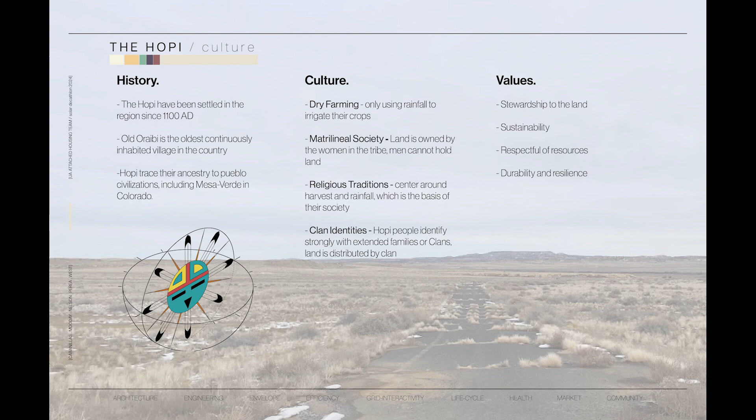Of the 14,000 registered tribe members, only about half reside on the reservation, a number that is declining. Many young Hopi leave for job and educational opportunities in larger cities and often do not return, leading to a significant gap in the young and working age populations. This trend comes at the cost of losing touch with Hopi culture. The aim is to encourage these populations to stay by creating Tawa'ovi to offer job opportunities, education, and modern conveniences on the reservation.

Many of the Hopi still live in villages with traditional homes. 35% of Hopi homes lack running water and electricity, leading to an acute lack of safe and comfortable housing on the reservation. The Hopi asked for an attached housing proposal to help solve this problem. The Hopi tribe used a detailed SWOT analysis to define the goals of the new village. They emphasized their rich historical and cultural values, but acknowledged challenges such as their coal dependency, lack of housing, and lack of infrastructure, issues that we aim to address through our project.

In their landmark Economic Strategy Council in 2000, the Hopi outlined the following vision for the future of the tribe. Hopi should be a place where Hopi culture and religion are strong, sacred sites are protected, culturally and environmentally sensitive development occurs, the land is looked after, there are jobs and businesses, quality infrastructure serves, everyone has their own quality house, public facilities serve all needs. Our mission is to help the Hopi obtain their vision by providing comprehensive housing solutions that reinvest in their community and keep true to Hopi values.

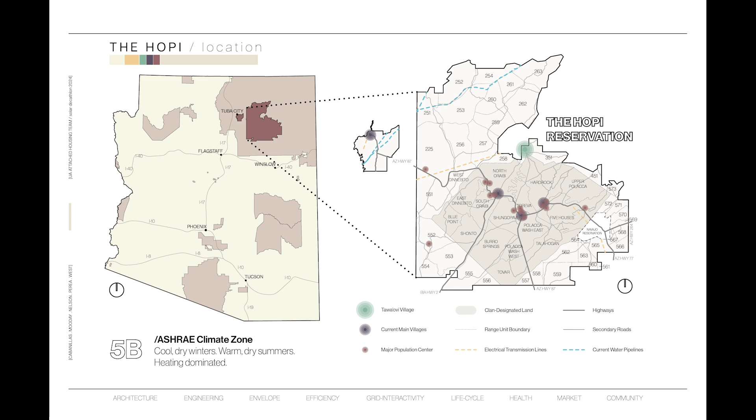Tawa'ovi, translating to Place of the Sun, or Sun Village, was chosen by the Hopi tribe to be on a remote site away from clan and spiritual lands. The project is in ASHRAE Climate Zone 5B, so it is cool, dry, and heating dominated, with an annual temperature range between 20 and 90 degrees.

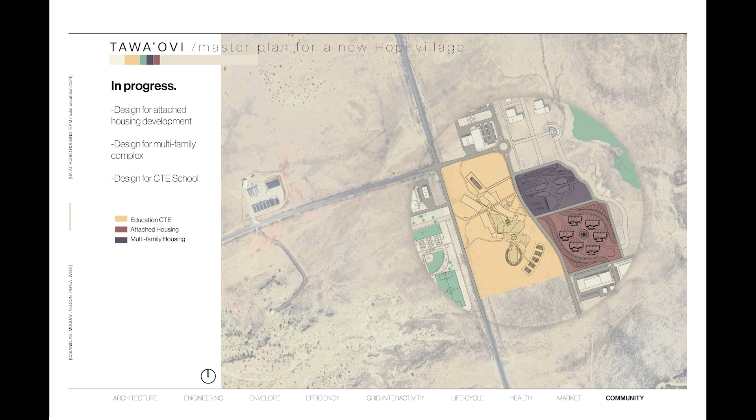This is the site of Tawa'ovi in its current state, as there has already been progress done on the solar farm. This is the progress being proposed by the Solar Decathlon studio, including our attached housing site, seen in red, which neighbors the multifamily complex and the education building. These 3 projects will act as a strong base for Tawa'ovi, providing necessities. In the future, this is what Tawa'ovi is imagined to expand to, creating a culturally rich and self-sufficient community that utilizes our scalable design to provide more housing as the community grows.

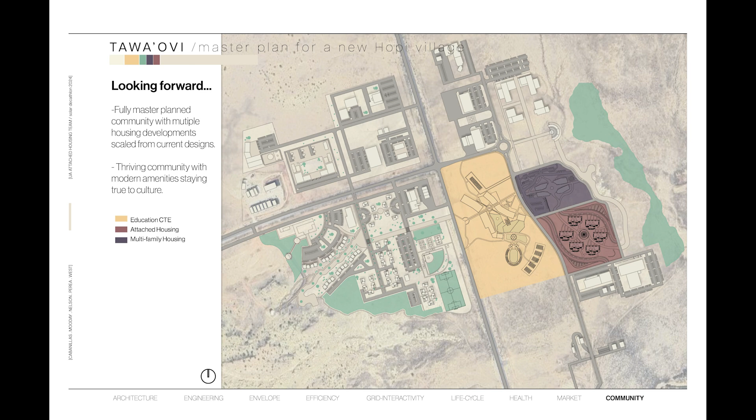The Hopi's coal-dependent economy was devastated in 2019 with the closure of the Peabody coal mine, in which the nation lost 85% of their non-federal revenue, ultimately leading to their commitment to transitioning to clean and renewable energy moving forward. To achieve our ambitious goals, the first step is to establish a resilient energy source for this remote community, which is too far away to be connected to the main electric grid. Working with the existing solar farm, we are designing each building to be a GEB, Grid Interactive Efficient Building, that draws energy from within a microgrid.

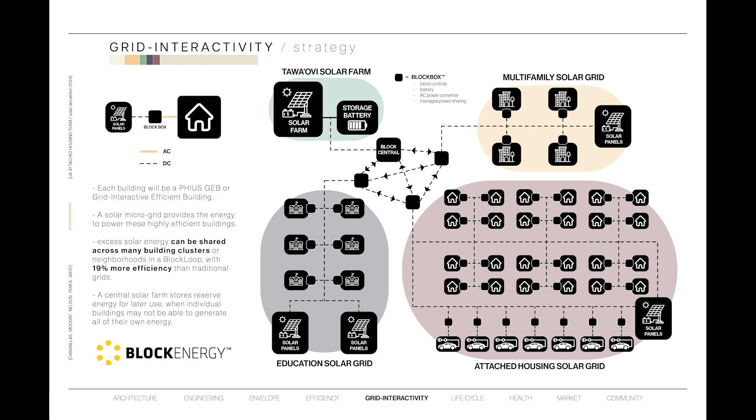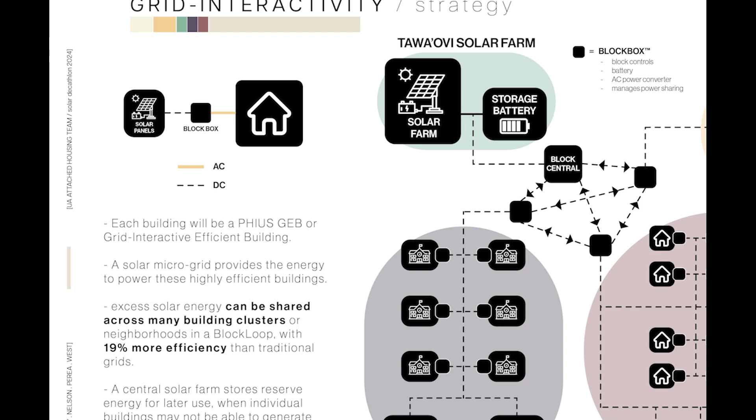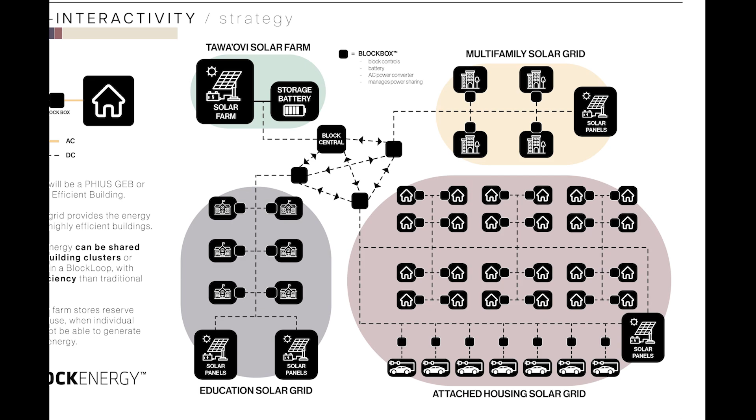Partnering with Block Energy, we utilize their innovative block boxes to distribute DC electricity from solar PV to each building. These interconnected smart batteries allow seamless energy sharing, resulting in 19% higher efficiency than traditional grid systems. Moreover, neighborhood block loops can be connected to create a resilient grid of grids rooted back to the solar farm, smoothing out duck curves, and most importantly, providing energy sovereignty to the Hopi.

We developed 4 goals that respond to the specific requests of the Hopi. First, we want to celebrate culture by implementing traditional Hopi design motifs that will allow people to resonate with the building. Second, we want to cultivate community by providing shared cultural spaces that will allow neighbors to connect. Third, we want to prioritize efficiency by adhering to PHIUS Zero standards and emphasizing passive strategies. Lastly, we want to promote well-being through careful site design and the use of clean energy.

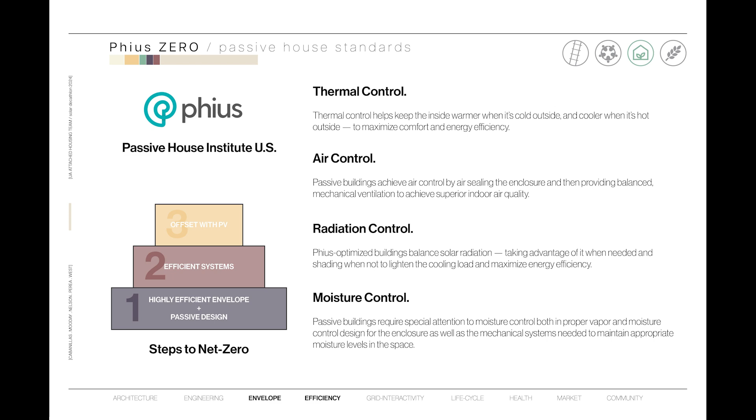Designing net zero homes can be challenging, but by aligning Harvest Mesa with PHIUS Zero standards, the path to net zero housing becomes clear. Phius prioritizes climate-specific thermal, air, moisture, and radiation control to create highly efficient interiors requiring minimal energy for heating or cooling. Using efficient systems offset by photovoltaics enables net zero energy consumption for the community.

Harvest Mesa features clusters oriented to maximize solar heat gain during the cold winter months. Per the Hopi's requests, the main paths are oriented on the summer solstice lines, anchoring this project in its environment. These paths lead to a central plaza, also serving as a jogging route, while berms and swales direct water flow to gardening plots at the corners of the site, enabling residents to cultivate their own crops.

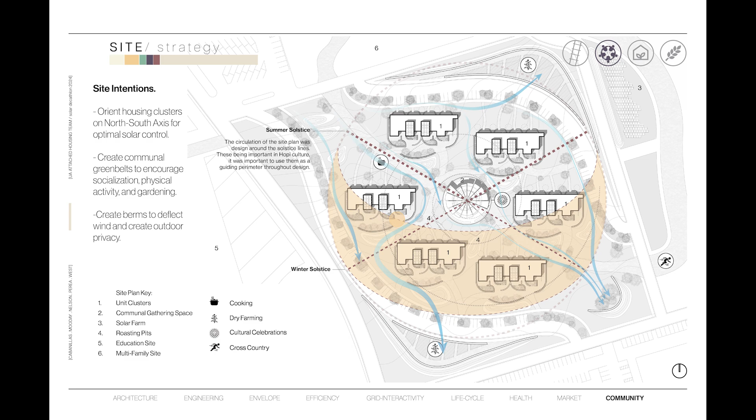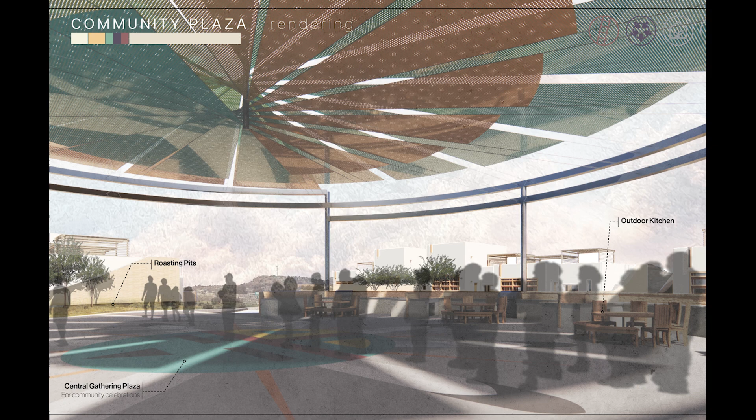As shown in this rendering, the community plaza provides a grand space for traditional celebrations and gatherings, along with providing community kitchens, as we learned the Hopi place great value on being together. We implemented health-enhancing strategies at 3 scales. On-site, berms and walls block windborne dust, and vegetated areas filter air pollutants. Inside each unit, an ERV supplies fresh air, improving air quality, and by utilizing clean energy, we prevent pollution, aligning with Hopi values.

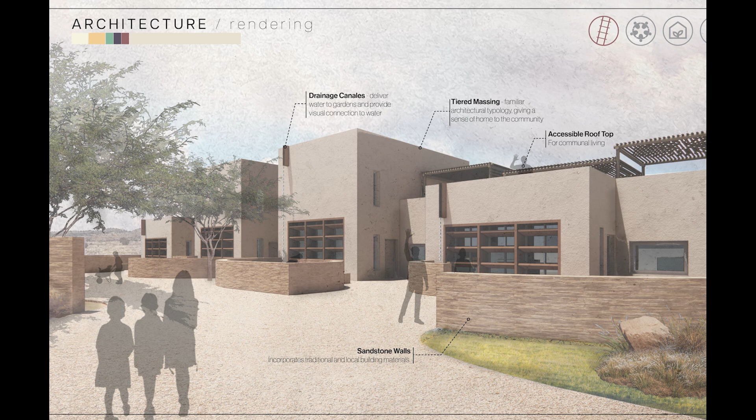To make this community feel like home, we've adapted traditional Hopi architectural motifs, including a tiered massing that enables close and communal living. Additionally, site walls create inviting spaces between units that gracefully encourage spontaneous interaction between the residents. After harvest, the Hopi need space to sun-dry their crops, so we designed shading structures on the accessible rooftops. These shaded rooftops provide another opportunity for gathering within the condos.

We offer 2 unit types to accommodate different family sizes. There is a 2-bed, 1-bath unit and a 3-bed, 2-bath unit, with 2 of each totaling 4 units per cluster. The Hopi asked for units to have an open floor plan as it allows for more space for celebrations and for families to cook together. We also included green spaces for each unit.

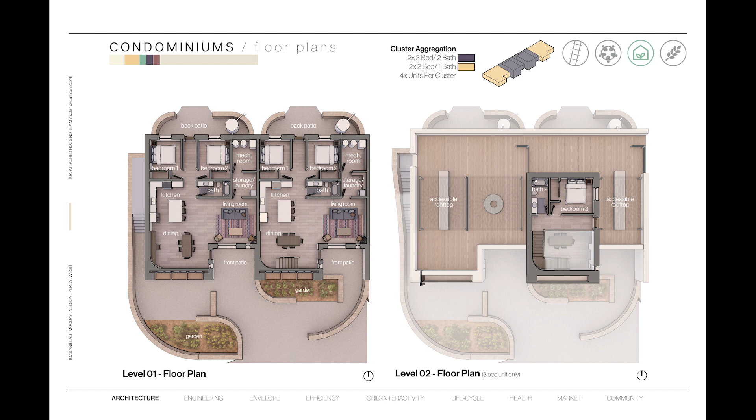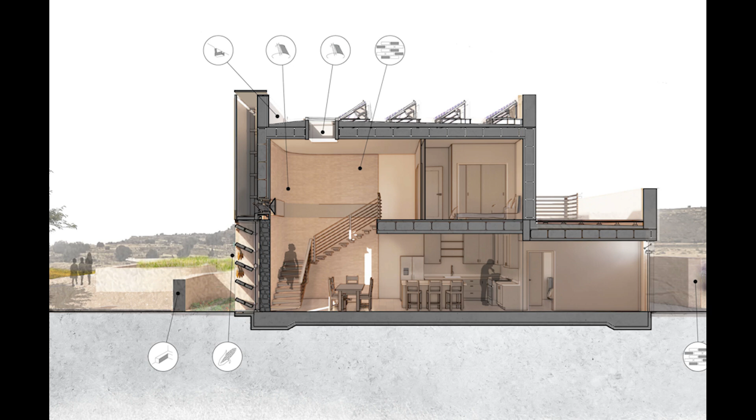You'll notice that in the section, each condominium features traditional design elements such as canales, outdoor gathering benches, and locally sourced sandstone throughout, with the goal of creating familiar and comfortable surroundings for the residents. In the interior, a rounded wall, light wooden staircase, and skylight reflect the form of the kiva, a space connected with Hopi spirituality. The Hopi were also excited that the use of sandstone will revive the Hopi masonry trade in the community, creating new jobs.

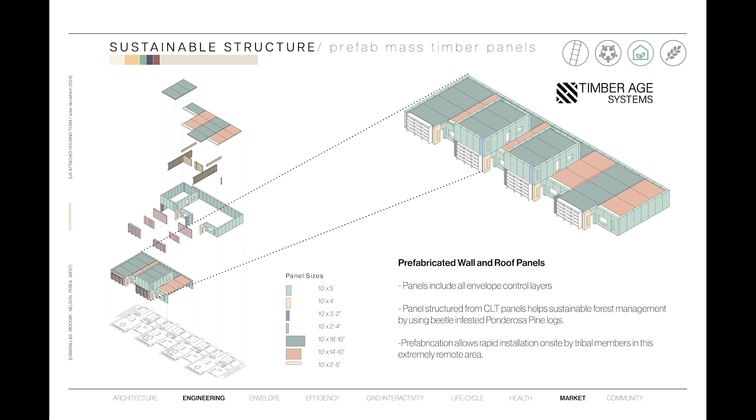Due to the site's remote location, we opted for prefabricated parts for easy transportation and rapid assembly. We've teamed up with Timber Age Systems in Durango, Colorado, which manufactures Phius-certified CLT wall and roof panels that support healthy forests. Clusters are designed in modules with dimensions that fit the bed of a semi-truck. Glulam beams support the second story with longer roof spans. Timber Age has volunteered to teach Hopi construction crew how to install panels on site, stimulating the local economy by creating construction jobs.

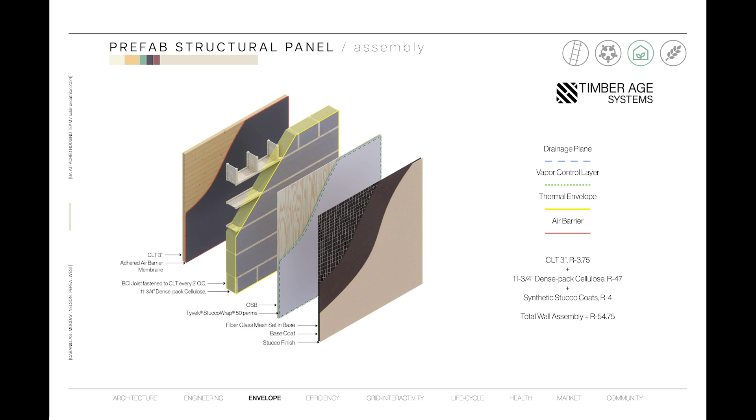Each panel features a 3-inch CLT panel for structure. Air and vapor control are included within the assembly, and thermal control is provided by dense packed cellulose sandwiched between 11-inch thick I-joists. Synthetic stucco is used as the exterior cladding, as it resembles a traditional plasterwork but lasts longer in this harsher climate. Examining the wall section detail, we see again how the panels are designed to seamlessly connect with the roof and foundation, ensuring continuous insulation throughout and minimizing thermal bridging at connection points, as tested by our THERM model. A pedestal paver system is also included to make the rooftops accessible.

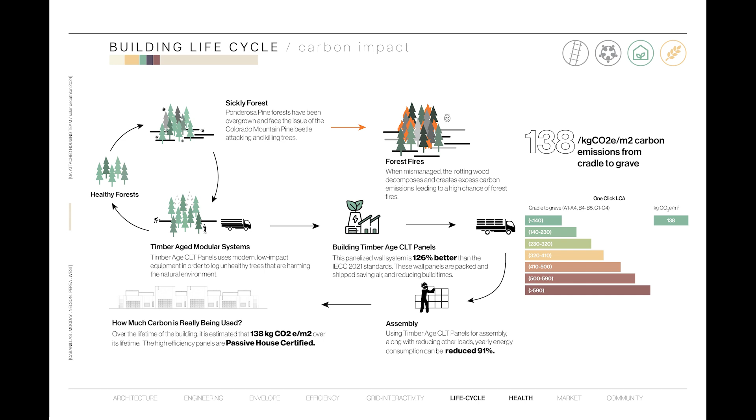The prefabricated panels, sourced from Timber Age in Durango, Colorado, address the challenges posed by the Colorado mountain pine beetle infestation. By repurposing dead, fallen trees for CLT production, Timber Age not only mitigates forest health risks such as wildfires, but also employs low-impact equipment to minimize carbon emissions. Our analysis using One Click LCA indicates low carbon emissions from cradle to grave.

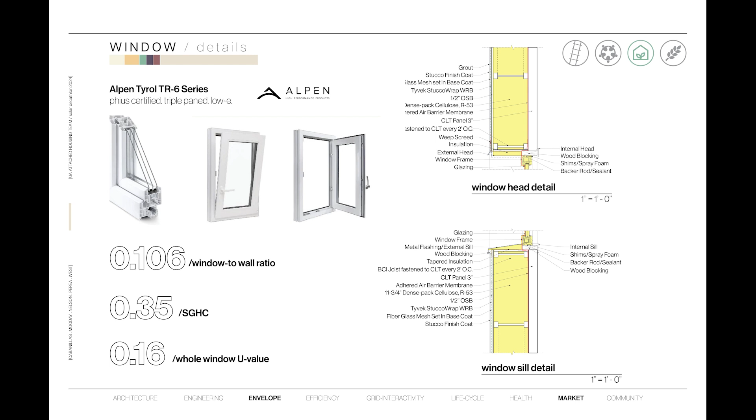Responding to the Hopi's preference for fewer, more efficient windows, we strategically place Phius-certified triple-paned windows for passive solar heat gain and optimal daylight, maintaining a low window-to-wall ratio. We prioritized using local products and services to reduce transportation costs and reduce our carbon footprint. We've used sustainable materials that come in $500,000 under our Kickstart budget of $2 million provided by the CARES Act of 2020. As Hopi crews skill up and do more of the work themselves, we expect costs to decrease by 3.3% over time compared to conventional construction methods.

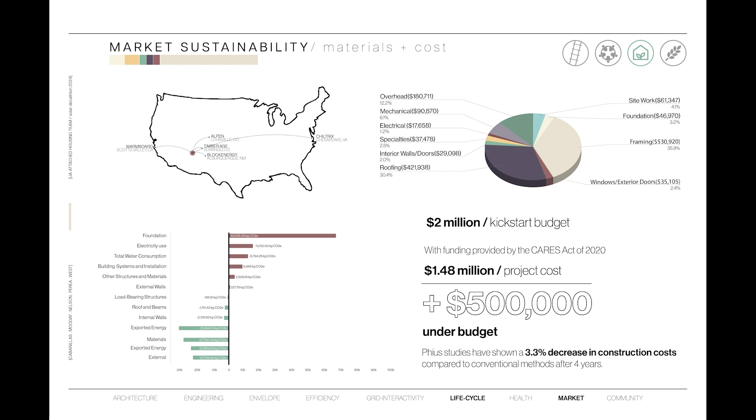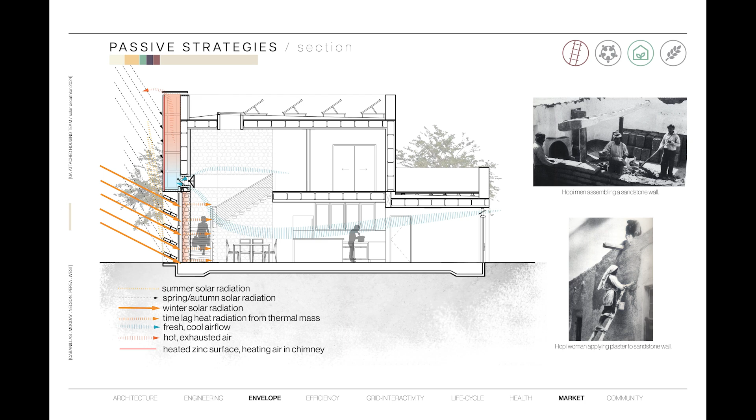This homegrown housing ensures access to clean energy, job security, education, and Hopi kinship within the reservation, strengthening the connection to their homeland. We are so excited about presenting our passive strategies because when meeting with our Hopi clients last month, they were really enthusiastic about how we have learned from their traditional wisdom and materials to provide comfortable, up-to-date, and efficient housing.

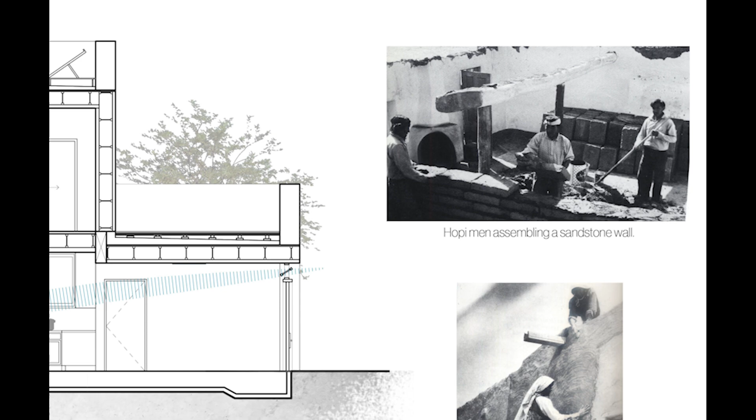Andrew, our tribe liaison, noted that for centuries, the Hopi have utilized local sandstone for natural heating and cooling in their homes, a wise use of thermal mass. We've designed an innovative passive wall using this sandstone and a Trombe wall combined with a solar chimney, leveraging the abundant sunshine for both heating and cooling in the project.

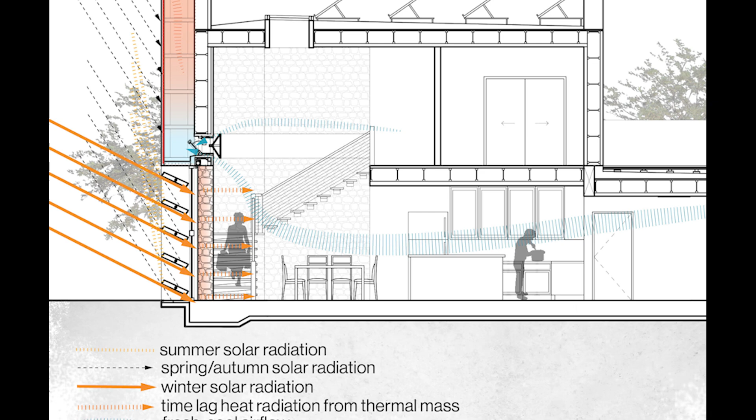In the Trombe wall, sandstone absorbs and re-radiates heat, providing 24-hour heating and reducing mechanical loads upwards of 49%. In the solar chimney, air is heated and rises, drawing cooler air through the building, exiting through an automated triple-pane window which opens based on interior and exterior conditions.

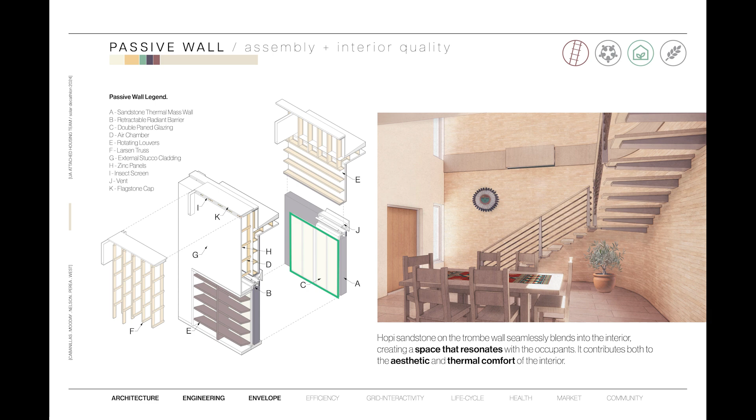The Trombe wall covers a large part of the southern facade to maximize solar gain. The assembly includes clear glazing, which allows solar energy to charge up the sandstone thermal mass wall. Above, a Larsen truss creates an air chamber, an essential part of the solar chimney. Inside, the Trombe wall has been fully integrated into the architecture, creating a kiva-like interior.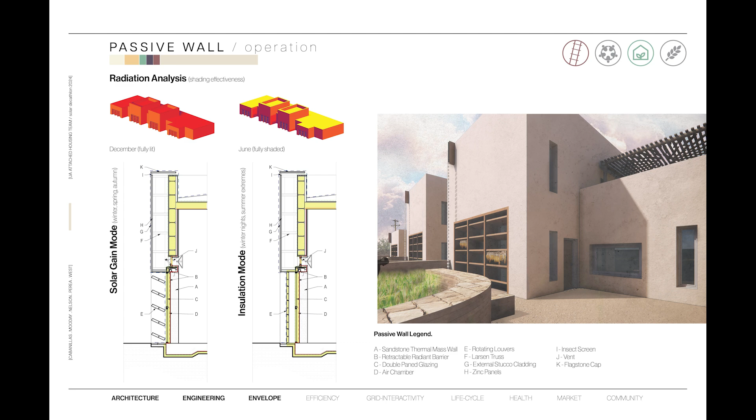Shading louvers play a crucial role in managing summer solar gain, as shown in the radiation analysis. Fully insulated, these louvers can be closed to create an additional thermal barrier of R15. Additionally, they provide space adjacent to the gardens for drying crops. In the details, you can see how the decorative fascia conceals the operable window in the solar chimney, as well as the retractable radiant barrier in the Trombe wall for added insulation.

A radiant floor system will be providing both heating and cooling. Hot and chilled water for the radiant system will be provided by a Chiltrix air-to-water heat pump and stored in a buffer tank which acts like a thermal battery. From the tanks, a pump will send the water to a manifold that will distribute the water to the zones requiring space conditioning.

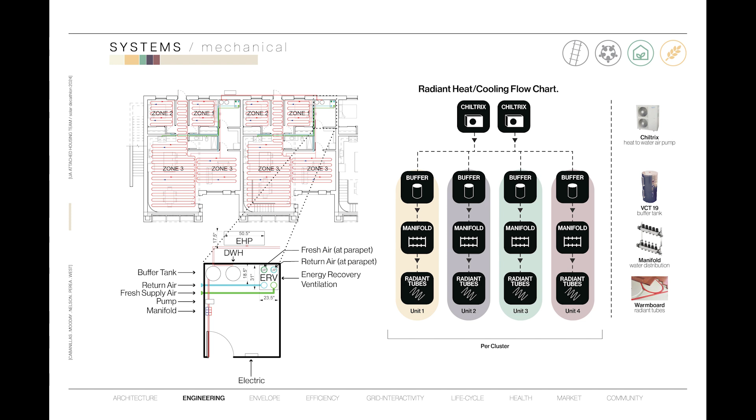A hydronic system is more efficient than a forced air system because 1 unit of water can carry much more heating or cooling energy than the equivalent amount of air. Moreover, it eliminates the need for refrigerant circulation, reducing the risk of leaks and the contribution to global warming. This diagram shows we've coordinated the passive and active systems throughout the seasons to maintain thermal comfort efficiently.

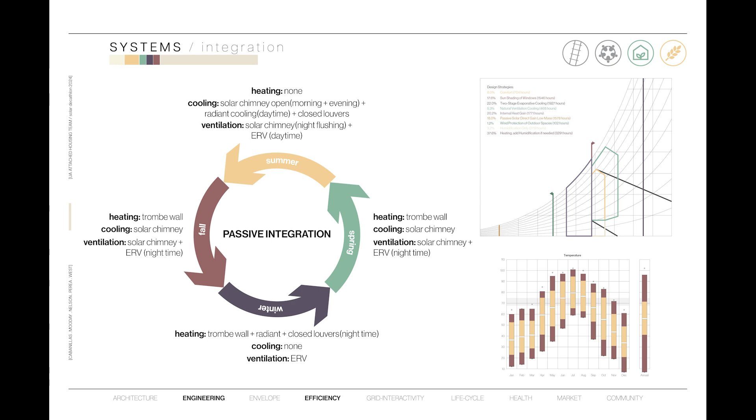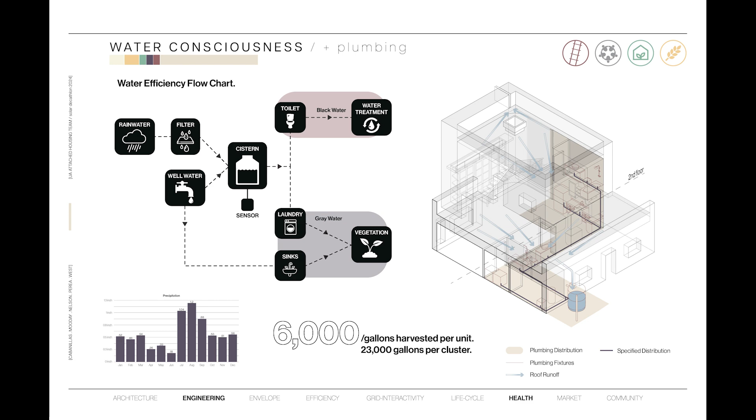Rain is an integral part of Hopi culture as it irrigates their dry farming and is the basis of many of their celebrations, meaning that they are conscious of their water usage. We've integrated a water harvesting system, directing roof runoff into cisterns at the back of each unit, with each one projected to collect 6,000 gallons annually. Additionally, rain chains at the front of each unit visually connect residents to water flow.

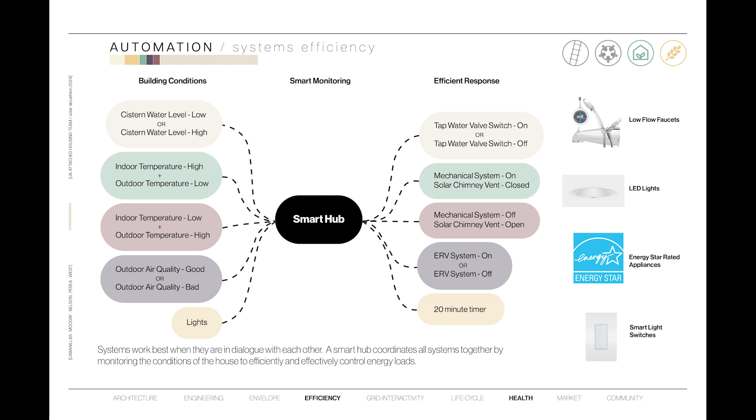Temperature, water levels, and lights will be regulated through a smart hub, switching the systems on and off as needed, coordinating all systems together by monitoring the interior and exterior conditions to efficiently control energy distribution. Using smart switches and Energy Star rated appliances, we boost energy efficiency by reducing electricity consumption and providing automated control.

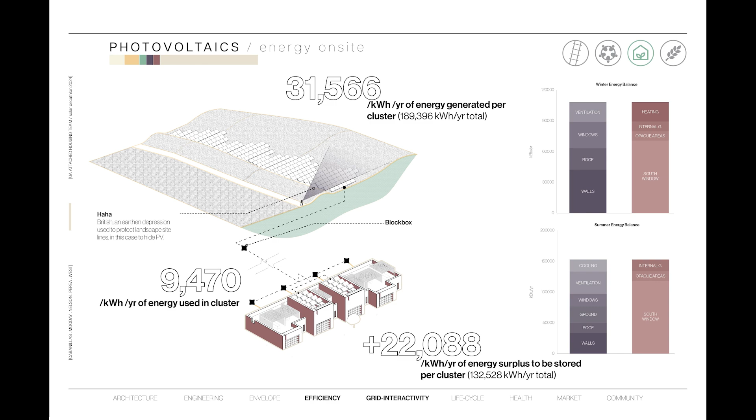Photovoltaics power Harvest Mesa. They generate more energy than the buildings use, giving a surplus of 22,000 kilowatt hours per year back to the grid, even accounting for worst-case weather scenarios. While some panels are located on the buildings, the remainder are located on-site, concealed by ha-has to preserve natural views. By implementing climate-specific and passive strategies, we achieve comfortable net-zero condos with a HERS score of -8.

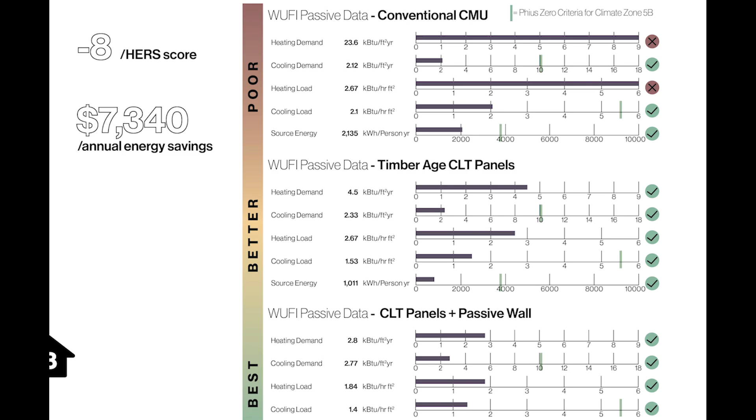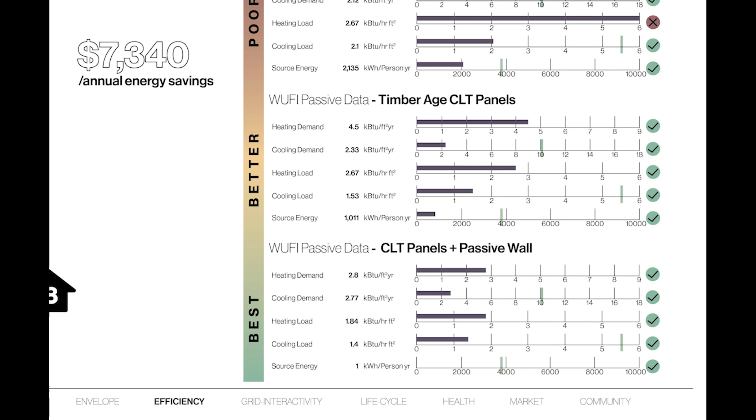Further analysis in WUFI Passive shows that we can't meet Phius standards by building to code, but the CLT panels we use get us to this target. And the optimized design significantly reduces heating demand, yielding $7,340 in annual energy savings per cluster.

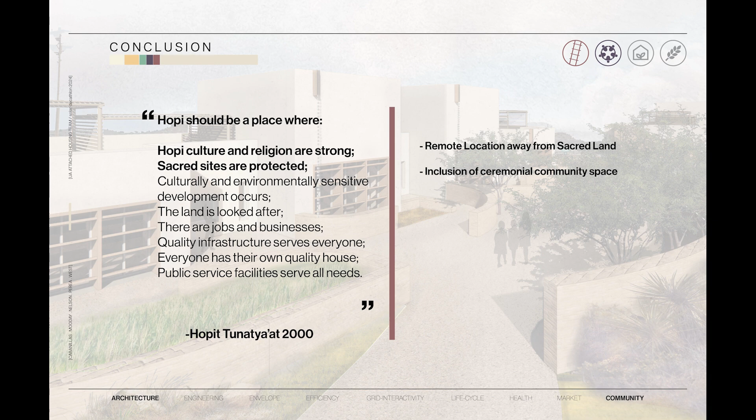Going back to the vision statement, we were able to work with a remote location away from sacred land and include a ceremonial community space. We also used low-impact materials and effectively managed water. Helping the economy and community, our design reintroduces masonry, a traditional Hopi skill, to bring jobs into the community. And Harvest Mesa provides a comprehensive and efficient energy grid that gives the Hopi sovereignty over their energy.

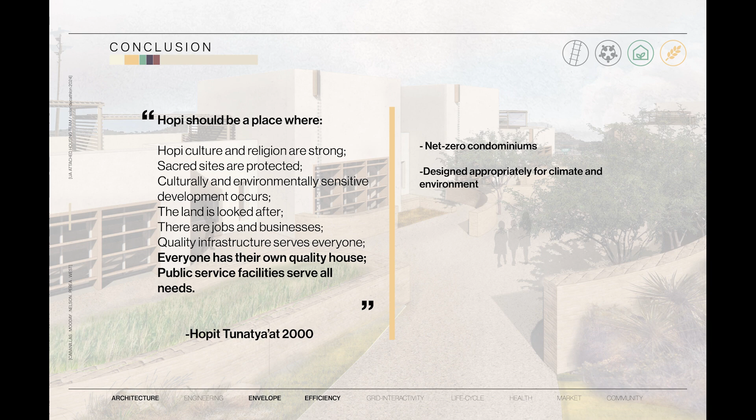Lastly, we are proud to provide the Hopi with this design for net zero homes designed with respect for culture, climate, and environment. And with that, welcome to Harvest Mesa!